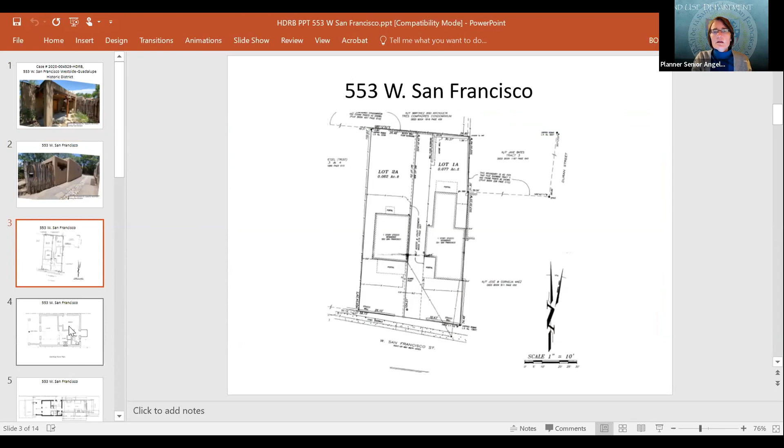This is parking here. The applicant proposes to add, this is the existing site plan. This is the existing house, and that's the existing floor plan as well. This is the proposed floor plan. This is the existing mass, and this is the addition on this side.

The applicant proposes a 500 square feet addition to its north elevation. Its height is 14 feet 4 inches, which is about 2 feet above the existing building and within the maximum allowable height in the streetscape.

The addition on its west elevation, okay, the existing west elevation, the side of the house, is this. This is the proposed west elevation. The addition will have 3 sets of divided light windows with territorial style wooden pediments, and they also have transoms. A new divided light wood door and small divided light window will be surrounded by a 1.5 inch brick mold and a concrete sloping sill added to the south of the window.

This is the creation of a new house entry. An outdoor fireplace is proposed for the exterior southwest corner of the building. I'll show that in another elevation. The east elevation features 2 of the same double windows.

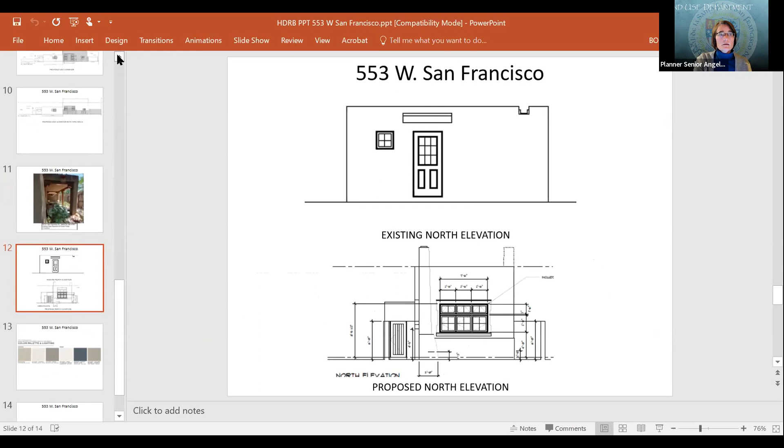On the south elevation, front of the house, the existing house south elevation is this, the front of the house. And the applicant proposes, behind the yard wall, a new portal and a new gate.

The new entry gate will be wooden, flanked by pilasters and a carved wooden overhang. This is the proposed new yard wall, gate, and the overhang, which is at the same height of the existing portal. The gate entrance leads to a path to the new house entry on the next elevation.

The applicant also proposes to add 2 new wooden gates to this east elevation. Stucco will be El Rey cottonwood, and the house's color palette includes whites under portal and for windows and door pediments, black sable for windows and door trim, and soft browns for the corbels and the beams.

Here's the palette. And the proposed light fixtures are these blue goosenecks.

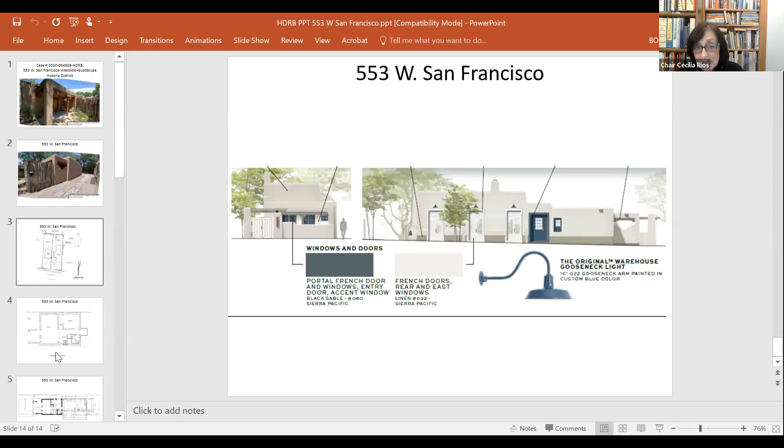Thank you, Angela. For clarification purposes, the 500 square foot addition on the north side, did you indicate it's going up to 14 feet 4 inches? Yes, and so the existing house is now approximately 12 feet 4 inches. Is that correct, because the addition is going up by 2 feet? Yes. And do you know the interior ceiling height of the proposed addition? I do not. Okay, I will ask that of the applicant.

Also, 3 of us were on the field trip today, Frank Katz, John Bienvenu, and myself, and I noticed there is a coyote fence right there in front of the entrance to what is the existing house now. Is that coyote fence remaining, or is that going to go away? I believe that's remaining. Okay, but I'll ask for clarification from the applicant if it's being replaced. Yeah, I'll ask the applicant that as well.

And can you also indicate to us what the public visibility is of the proposed addition? It's in the back of the existing building and is not publicly visible other than its height above the existing building. Okay. If I may add to that, it might be publicly visible, its east facade elevation would be visible at an angle from the street looking north.

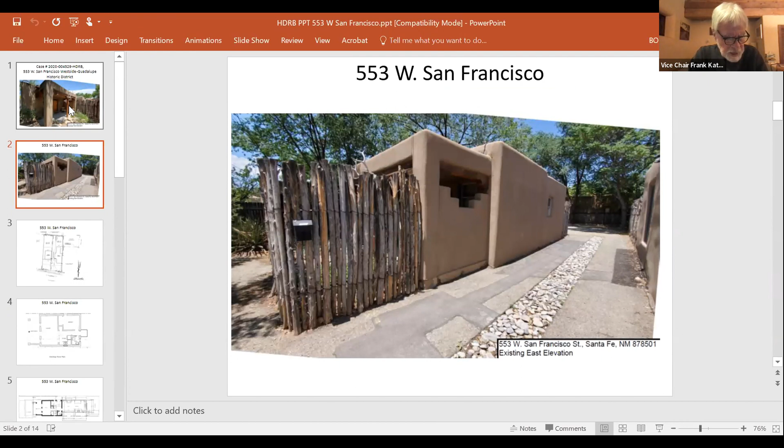The other question I have is the wood siding between the two windows on the new east facade in the back. Is that something that is appropriate style for this district? Vice Chair Katz, that is something that the applicant has added to the design, and in the Westside-Guadalupe Historic District, the design standards are a lot looser, and he can speak to that as he presents his case. But I assume that you would make an evaluation when you make a recommendation as to whether it meets the standards, and I was wondering if you had. I found that it meets the standards loosely. Was there a particular reference to that? No. Thank you, that's all. Thank you very much, Madam Chair.

Member Biedscheid? Thank you, Madam Chair. Yeah, I share Member Katz's concerns about the status, and I would be interested to know more about the history of this property, since it hasn't been evaluated recently and it qualifies on the basis of age. I had the same question about the wood siding.

I would like to know if there are other examples of this in the streetscape, in addition to the wood shutters that are proposed for the windows. I think it's a nice design, but I'm not sure if those elements exist in the streetscape.

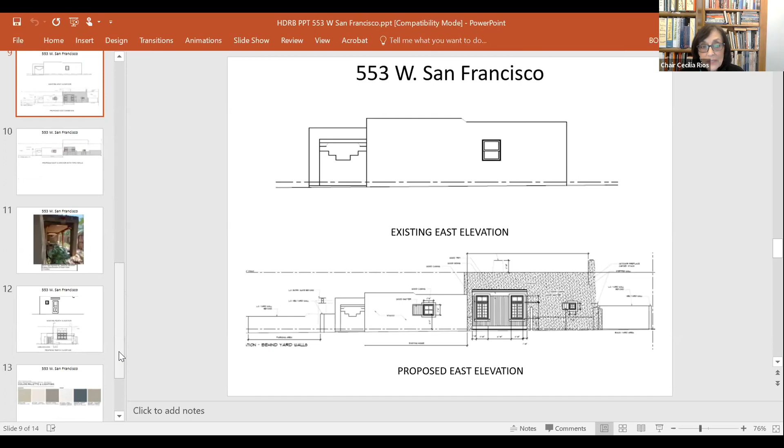And laundry as well. The new entry to the house will be on the west side. Is that correct? That is correct.

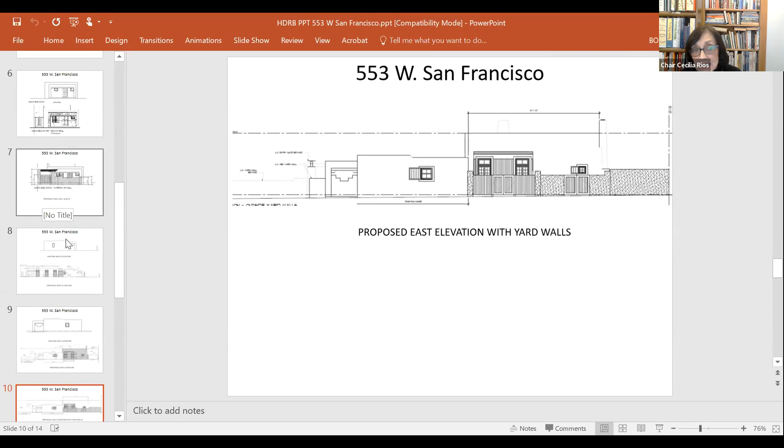Could you talk to us about the existing coyote fence? Is that going to continue, or is that going to go away? No, that will be going away. There were questions and some confusion about that. So you noticed there is a wall at the sidewalk. That will be maintained. The current coyote fence will be removed.

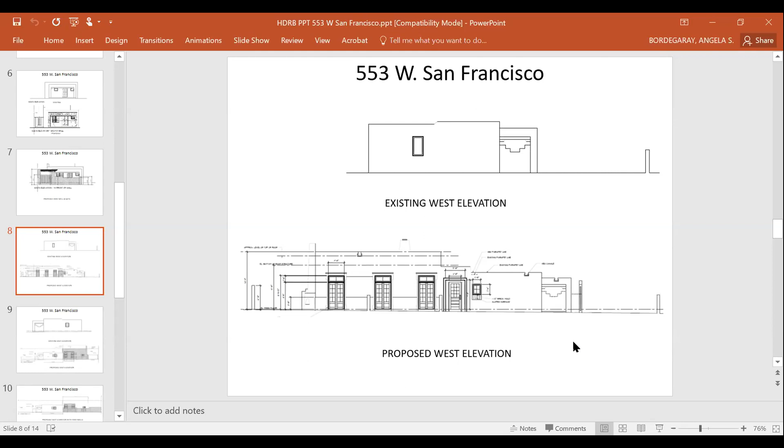What will replace it will be a 4-foot high wall. If you could go to that elevation, Angela, so we could look at it. It will be a 4-foot high wall.

We thought to go ahead and open that up so that you're able to, from the street level, see more of the character of the house. We never liked the coyote fence. It's way too tall. It covers up the architecture. It was never a feature that we really liked about the project, about the house.

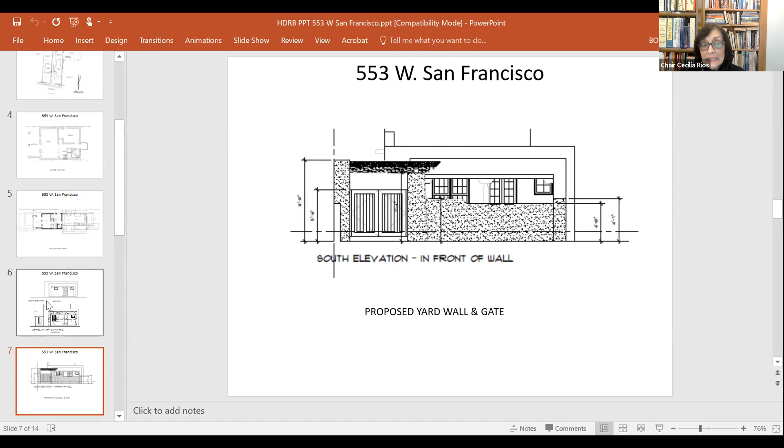So taking that down is an important thing for us. Reorienting the entry kind of makes us reorient the entry from the parking spaces, and that's why you have the design of this gate, which will give you access directly from the parking area, a straight shot down the side of the house into the new entry. And you are not planning a vehicular gate, correct, at the street? No, that is not in the plan.

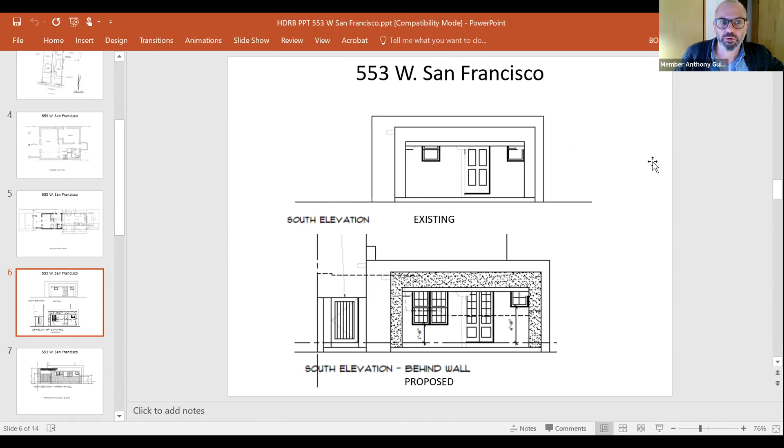Okay, Angela, if I may interrupt, Chair Rios, could you just show us the proposed plan? A lot of the stuff we're talking about would be a lot clearer. The floor plan. Member Guida, is that the slide before the one you're on right now? Sorry to interrupt. No, that's okay, I'm going to give you what you need. Are you wanting to see an elevation, Member Guida, or the floor plan? I'm clear on what's being proposed because I looked at the packet, but we're not showing the public the essential details here. The plan shows most of the things we've been talking about.

I would like to add that I did colored illustrations. You can see 2 of them on that last page. I've done colored illustrations for all 4 sides. I don't know why they're not in the presentation, but if you're interested in seeing them all, I can flash through them. I believe they were in the packet, but I'm happy to show them if you'd like to look at them, they might demystify things a bit more. I was under the impression you all were presenting that, so apologies for the misunderstanding, that you were doing a slideshow. Let me find them.

In the meantime, you indicated there were blue accents, can you be more specific on that? Yes, I'd like to address the color questions that came up, the blue being one of them. We are proposing that the entry door and surround are blue, and that will show up in the colored illustration I have. Under the portal, we're proposing that the new French door and new windows also be in blue. Unfortunately, Sierra Pacific's dark blue color is called Black Sable, I think, an unfortunate name because it's actually dark blue, not black. So to alleviate concerns about black on the house, there will not be any. It's a dark navy blue, just a little less purpley, a bit more on the green side of blue.

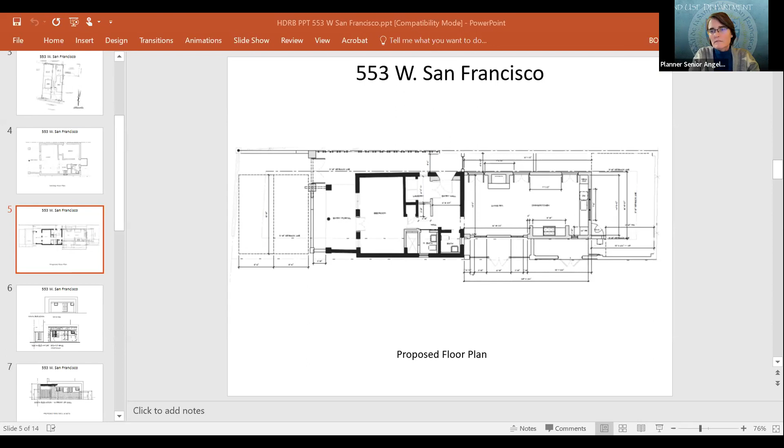Okay, can you see those? These are from your packet.

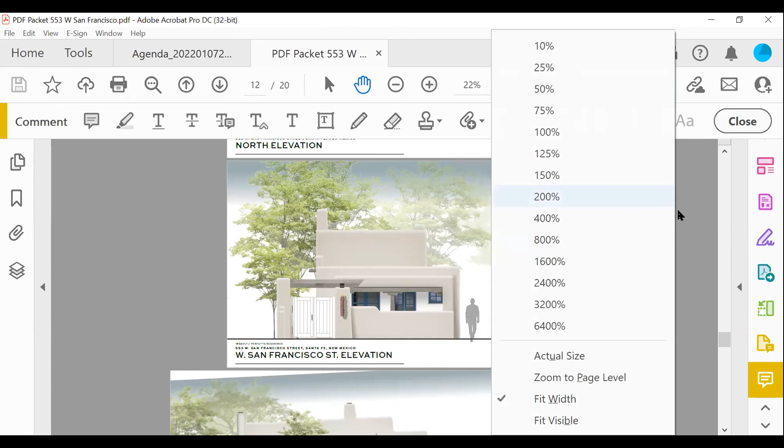So if you would go to the front, this West San Francisco street elevation. Yeah, so there you can see those are where the front facing facade windows and doors will have the blue accent.

We're also proposing a white stucco under the portal, and cottonwood as the color for the entire house is the one that we landed on. It is very similar to two other colors that are slightly warmer. I believe one is called Hialeah and maybe one is called Charleston.

Don't quote me on that. They're slightly warmer, a little bit less gray. We were trying to color match back to the historic building that is near the Arts High School in the rail yard.

I'm not sure if any of you are familiar with that, but there is the high school that's there. There are several kind of buildings around that. There is a historic building right next to that. I don't know what the current use is, but it may have been a restaurant in a previous world. We were matching back to the color of that building, which also has white territorial trim and white V-groove.

Those white V-groove garage doors were also what had inspired the V-groove gates and the V-groove paneling on the east elevation that you were questioning, that is between the windows.

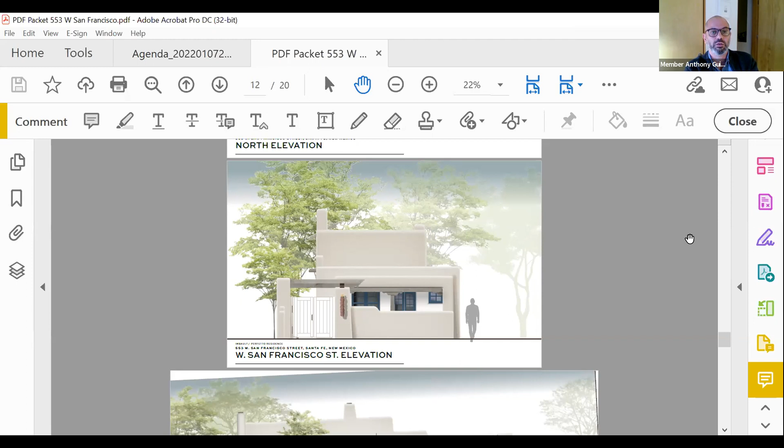But judging this project as fitting into an East Side context, I think is wrong. I think the board should be looking at this project in the context of this neighborhood and the articulation of the ordinance there. Overall, I think it's a great project. It doesn't overwhelm the site. It doesn't overwhelm the existing dinky little house. It makes a nice project in this district. I support it.

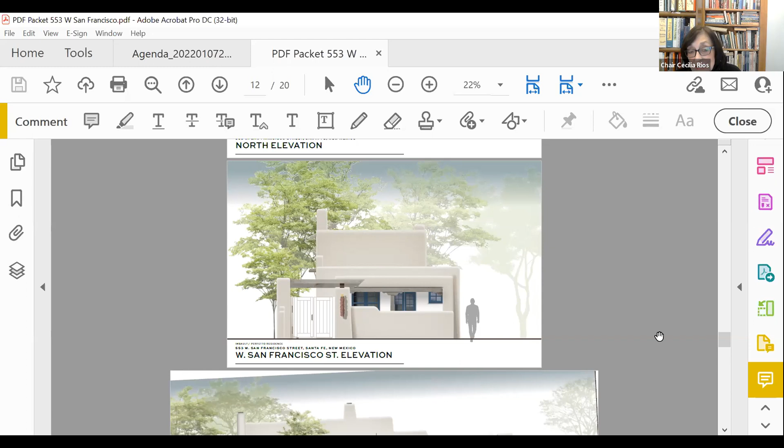Do you feel that the proposed addition is encroaching? Is that right on the easement? From what I am seeing, it is not, but did you indicate that it is encroaching on the easement?

Madam Chair, it's hard for me to tell from the slides that I've seen here tonight. I'm flying a little bit blind here, but I can tell you that the existing building is not only up against the easement, but right up against the property line as well. There is no setback currently, and it's unclear on that east elevation, on the east proposed addition, whether or not they're even getting closer. I don't think they can get any closer to the property line without encroaching on the neighboring property to the east.

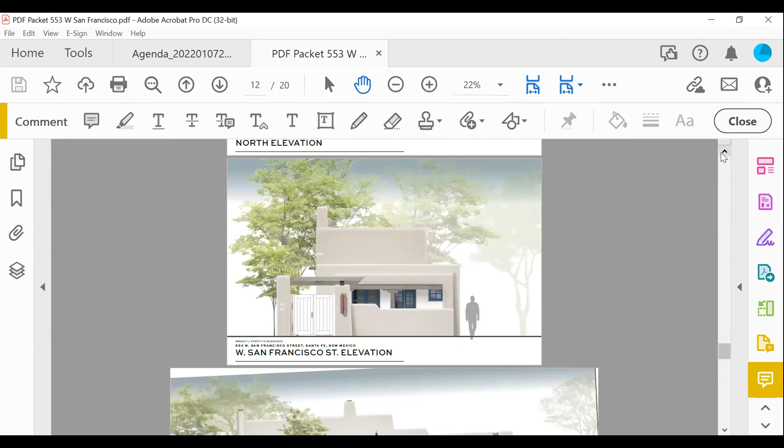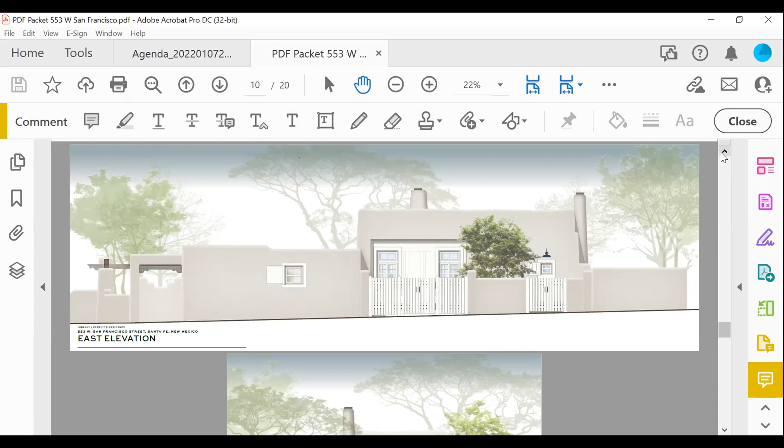Okay, we can get a clarification from the applicant in reference to that. Angela, just show us the existing versus the proposed floor plan. It's in the packet. Yeah, I think that was the best—existing, that's view, proposed.

What I see is a wall in front of it, and the doors through that wall open up right into the easement. Yeah, that's what I'm looking at as well.

And I'm not seeing on that floor plan the property line. But I know from the plat that the existing structure is on the property line or very close to it. The property line is drawn at the bottom of the proposed floor plan, the light line just outside the heavy black line of the existing house. Also, the site plan shows the property line and easement.

Correct, yeah, yeah, so those doors do open up over the property line. That appears to be so. And it's at least another 6 inches closer. So what this doesn't show is the proximity to the property to the east, and as proposed here would decrease the clearance in that little narrow driveway to about 9 feet.

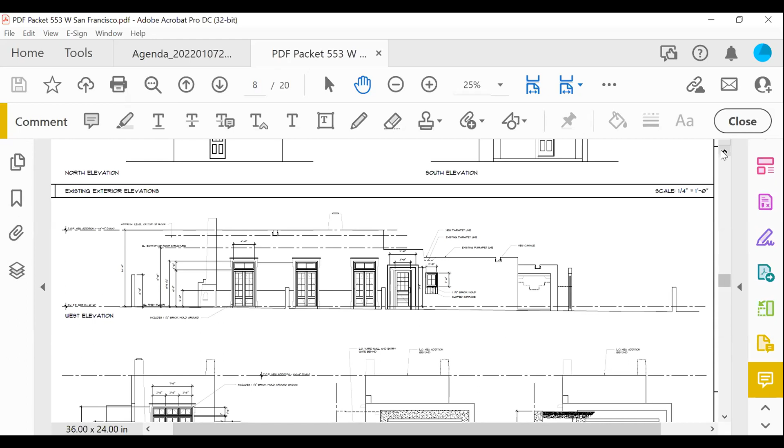That doesn't make sense. The other thing, I know that we're talking about lot coverage, which maybe we need to be careful about, but I noticed in looking at the proposed floor plan and comparing that with the site plan, that there's a 5-foot setback line, and the masonry structures which hold the gates on that new addition on the east elevation are built onto that setback. They encroach onto the setback. I don't know if that's relevant in this case, but it is something that I noticed and should probably be addressed by someone. Thank you, Madam Chair.

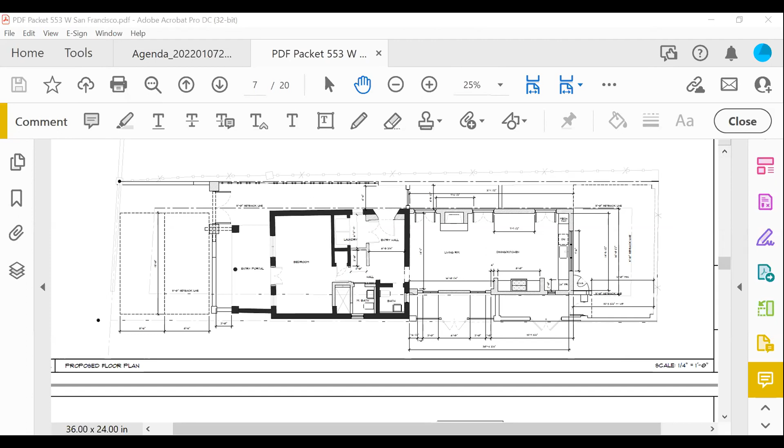And Angela, 14.4 is allowed. It is the maximum allowable, correct? Correct. It's based on the average of the applicable structures, buildings in the streetscape.

Thank you. Member Biedscheid. Thank you, Madam Chair. I just wanted to clarify my position for the board. I think what we're objecting to is the disparity in height between the original building and the proposed building.

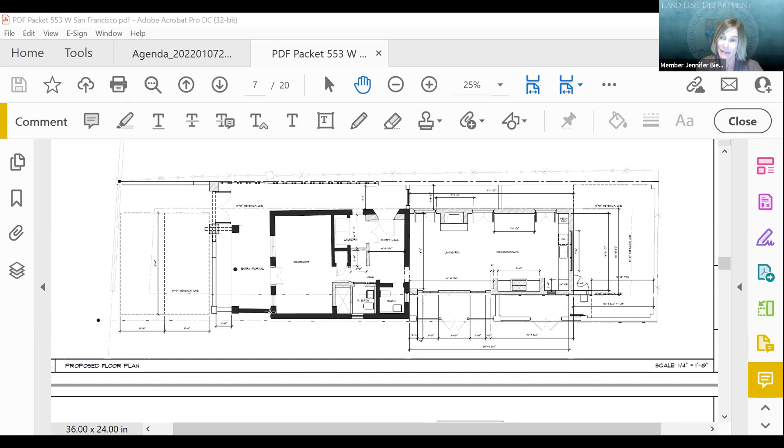But in thinking about it, I think the applicant is proposing exactly what we would advocate for in preservation. They're leaving the original house as is. They're not raising the height of that structure, which apparently has quite a low ceiling height and probably does feel quite small and cramped. But to their credit, they're maintaining that for the sake of the streetscape and harmony, and because they appreciate, presumably, the historic nature of that house.

The other thing they're doing that I think is quite commendable is removing the tall coyote fence and adding a low wall so that you can actually see that structure. And I wish more applicants would do that. They're also not adding a vehicle gate at the street, which blocks off the view of the house, which is often the case.

And I think in looking at the resulting lot coverage, it's very similar to their neighbors. I would say approximately it's 42% according to zoning, and I don't think that overwhelms the lot at all. So I support the project as well.

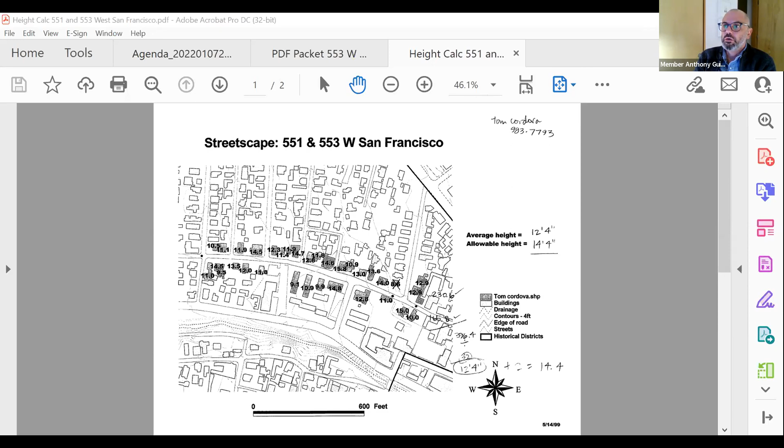Thank you for your comments, Member Biedscheid, and I'm going to take it to Member Guida, who was wanting to make a motion. Thank you, Madam Chair. In case 2021-004-529 HDRB, 553 West San Francisco Street, I move that the board approve the project as submitted, finding that it meets all of the district standards.

Seconds. And may we have a roll call vote, please? Member Biedscheid, yes. Member Bienvenue, yes. Member Guida, yes. Vice Chair Katz, no. The motion has been approved.

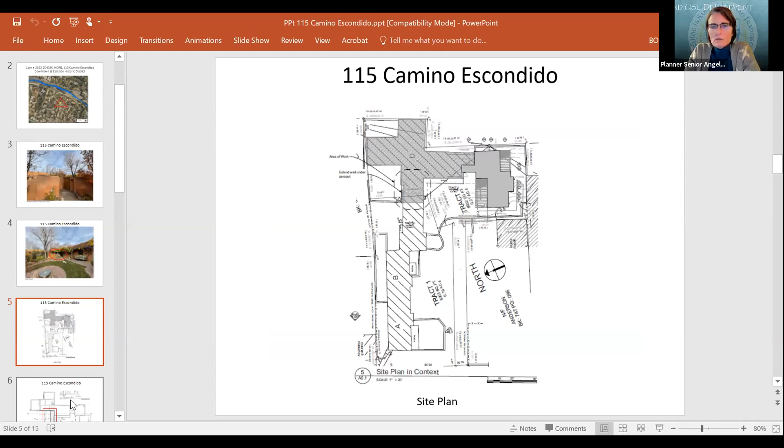This is the view of the approaching courtyard, and this is behind the courtyard wall, and the area of work is circled here in red. This is the front of the house. This is the south elevation, and here's the site plan. Here's the floor plan. This is the area to be worked on.

The south courtyard existing has these full length windows, they're even doors. There's a clerestory up here. This work was done sometime in the 70s and is believed to be... this is not a primary facade.

The applicant proposes to remodel the kitchen by replacing its existing full height windows, which are modern undivided light, large casement windows, with half height windows. This is the proposed half height windows. And the windows are under a portal.

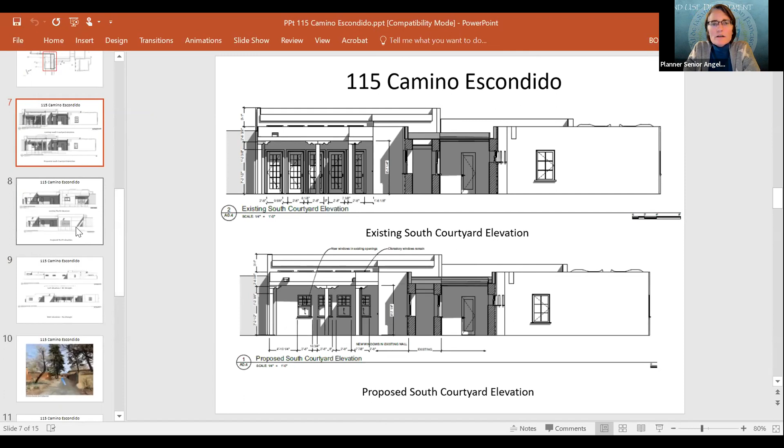Going to the rear of the house, the north side, this is the existing north elevation. We're talking about this area over here. It currently has this window and this overhang and these two doors.

The applicant proposes to bring out this portion of the wall to be flush with this, so it's one wall, and replace this window with 4 divided light casement windows. That's about a 4 feet extension to make it flush with the existing wall. The east window will be removed, and the west windows will be replaced with new divided light sliding doors.

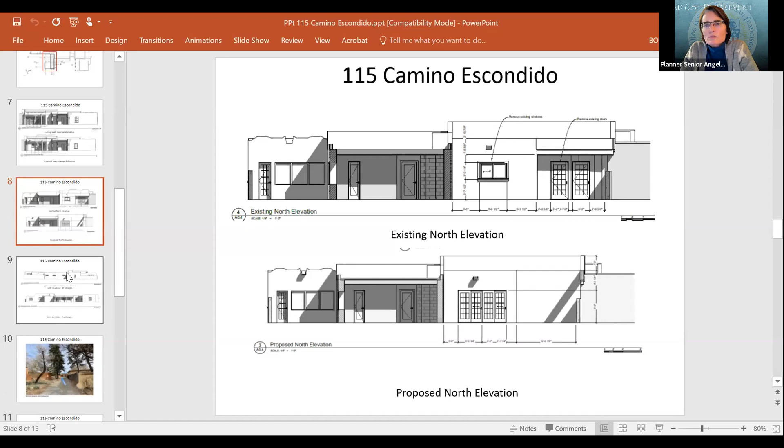The stucco will be patched and color coated to match the existing, and the exterior light fixtures will be shielded for night sky, with both decorative metal and ceramic fixtures proposed. Staff recommends approval and finds that it complies with section 14-5.2D, the general design standards for all H districts, and 14-5.2E, the downtown and east side district standards. And with that, I conclude my report.

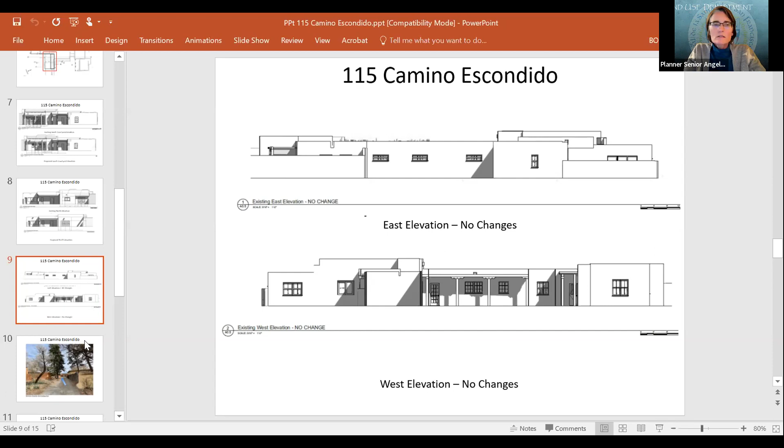So the work that is being proposed is not being done on any primary facades, is that correct? That is correct. Okay, thank you.

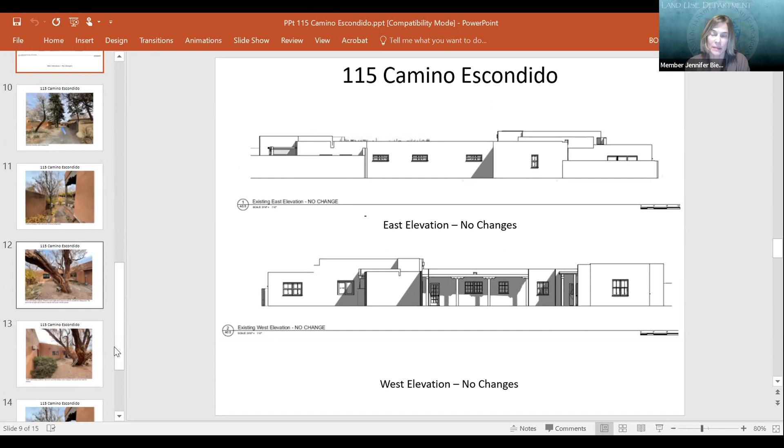Member Biedscheid: All right, Madam Chair, that was also my question. What are the primary facades? Member Katz: Well, that's my question too. What are the primary facades? Are there primary facades? Which ones?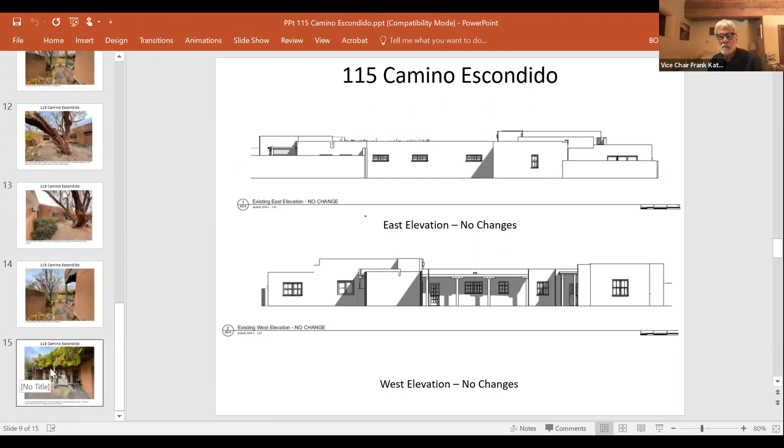Yes, members of the board. The primary facade is the front of the house. Let's go here. This is the facade being proposed for alterations. This is the front and the west facade that's considered primary. Thank you very much, appreciate it.

Okay, and Angela, would you describe where this house is located on Camino Escondido? It's quite a ways from the road. It is in this vicinity map. This is the river. This is Alameda and Dirt Alameda on the other side of it south. This is Camino Escondido, so it's Canyon Road's way up right here. And so this is towards the river east of Camino Escondido, and it has a long driveway entrance. Yeah, okay, thank you.

And I believe the applicant is Gayla Bechtel, and I see she is there. Gayla, can you hear me? Yes, I can hear you. Would you please swear in Gayla? Do you swear under the penalty of perjury that the testimony you're about to give is the truth, the whole truth, and nothing but the truth? I do. Thank you. Please state your name and address for the record. Gayla Bechtel, 320 Aztec Street, Santa Fe, New Mexico, 87501.

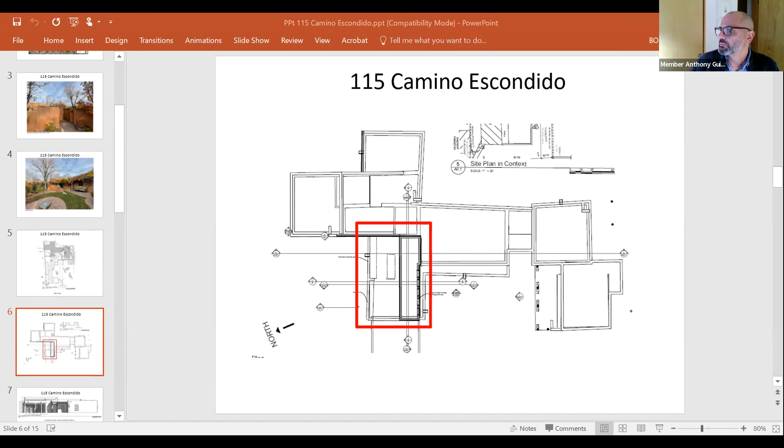Thank you. Good luck on your project, Gayla, and good evening. All righty, well, that was quick.

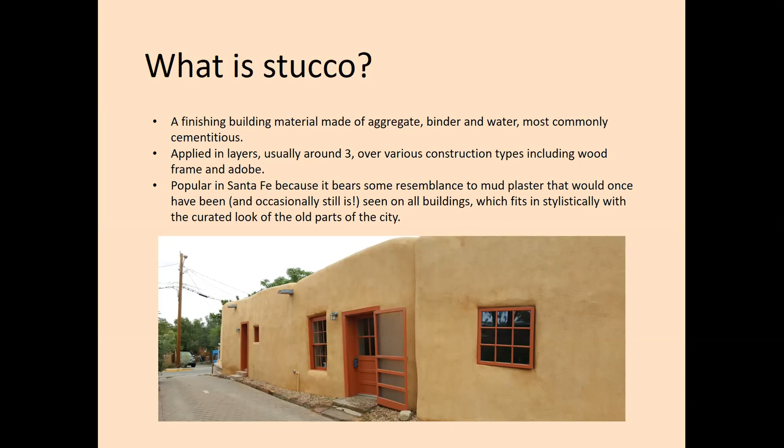To clarify one other point I've had many questions on: stucco and plaster are really the same thing as each other. It's more a semantic thing than a real material difference. Plaster is usually used to refer to an interior material, which might still be a cement material, while stucco is really just used outdoors on the exterior of a building. It's also specific to a cement or synthetic, like elastomeric, material. Things like lime plaster and adobe plaster are still generally called plaster even when they're on the exterior.

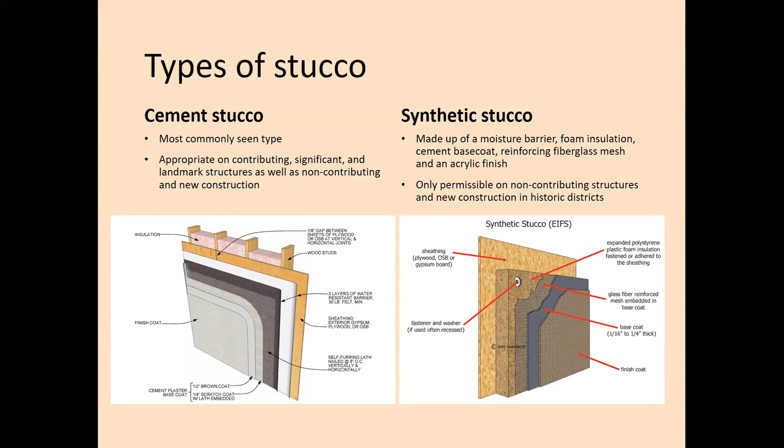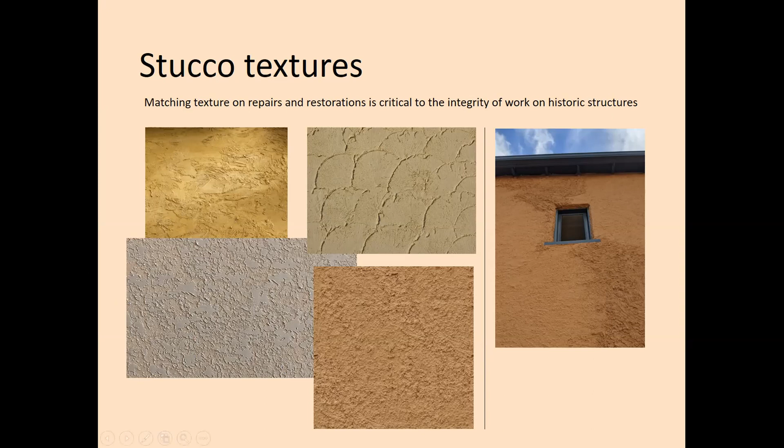Texture really can make a big difference in how a repair or an addition looks. On the far right here I have an example of what I'd consider a fairly mediocre repair, where the texture is very different in different portions, and where the repair was done is pretty evident. There's certainly an art to the application and matching of textures, and things might not always be completely invisible, but this is all done with fairly simple tools, trowels, sponges, and brushes. So there can be very good texture matching, which goes along with color matching as well.

As well as the whites are also seen sometimes. And just going back to repairs and matching things and adding additions, these colors will change over time, even when they're applied. So there's fading, there'll be variability, and these pre-mixed colors are really much more of a guide than anything. Sometimes colors can be similar but mixed differently, just to get a consistent color along a whole building.

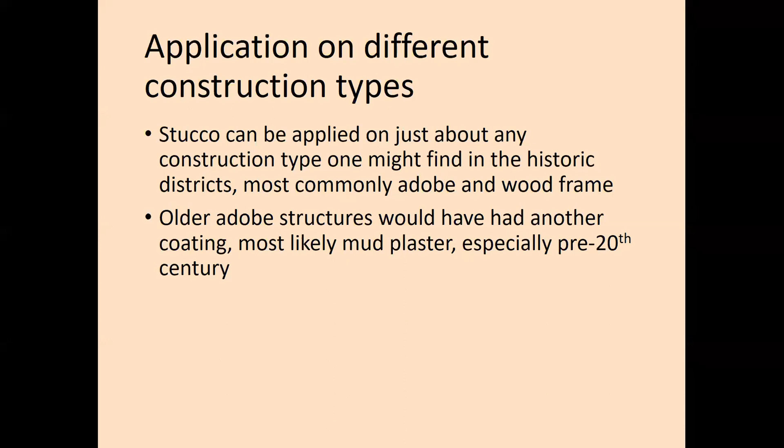So that stucco would have been at some point in its history an attempt to keep that same look, but to reduce the maintenance time. Mud plaster needs maintenance most years, and stucco certainly lasts much longer than that. It has a much longer maintenance cycle. So on adobe in particular, the stucco became very popular because it meant that you did not have to be working on a building every year seasonally.

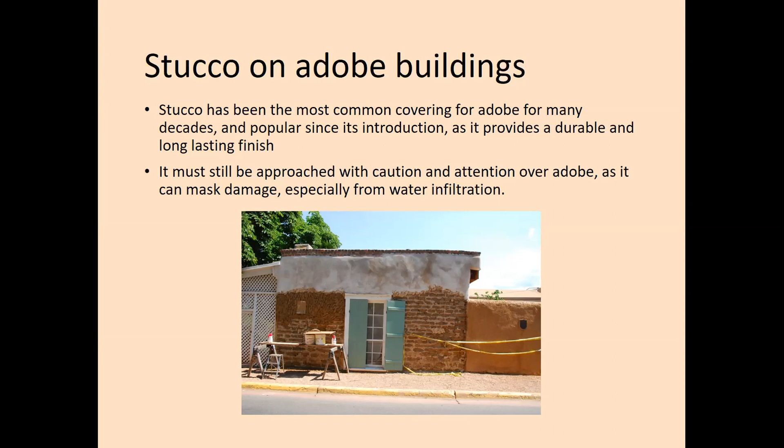And it works very well often, but it is a material that can hold water in against a surface, both on wood and on adobe. So it definitely needs some caution as it masks damage. If there's ever water infiltration, say from a roof, it can hide the problems until they're very large.

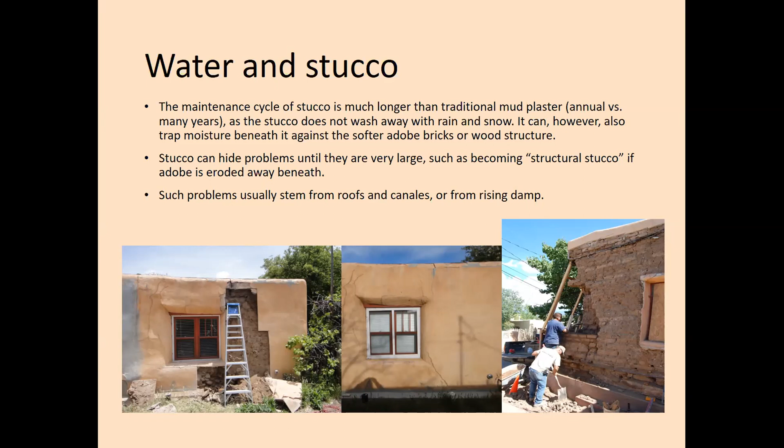But that said, with attention and some maintenance and attention to drainage and water removal, it's a very long-lasting and low-maintenance material. Cracks are really the main indicator of an initial problem, and underlying causes of issues, mostly roofs and rising damp. If those are addressed, then usually the stucco is absolutely fine for many years and does not require very much.

And I will add as one additional note that the cement and elastomeric stuccos are somewhat dissimilar materials, so it's better to use like with like. The elastomeric is much more similar to a paint when it's applied over the cement, and paint itself is not really an appropriate material over stucco. It causes peeling and difficulties, and it's at least currently not permitted over any of the more significant properties, even for covering other paint like graffiti.

So the two materials work fairly differently from each other, as well as working differently from, say, a lime plaster, which one sees very occasionally. So it's not as commonly noted here in historic districts. And that's sort of my general brief informative talk about stucco, and I'm happy to take some questions if people have them.

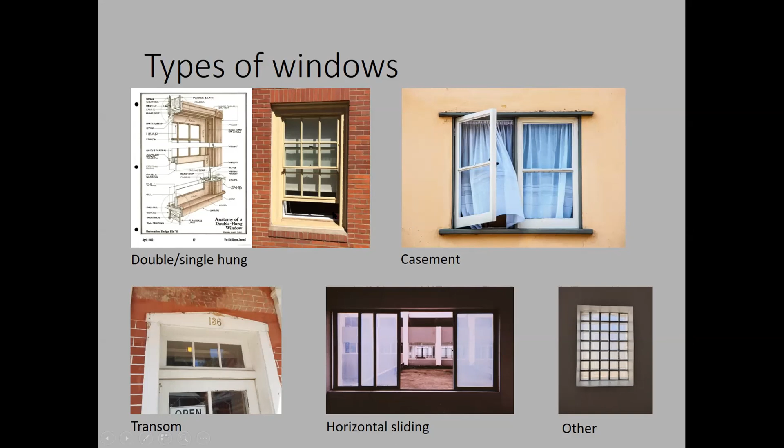There's definitely some different oddball versions of windows, but the casement and the double or single hung are what are most commonly seen. Double hung means both the upper and lower sash will move, and single hung means only one does - almost always that will be the lower sash. They can be made out of a whole variety of materials. Wood is certainly the most traditional, and that's what pretty much all windows would have been made out of until about the 1880s.

Whether they be double hungs like this one pictured, or casements, steel windows were introduced in the 1880s. They didn't really become popular in places like New Mexico and the Western United States until after World War I. They were more of a European invention.

And then there's the vinyl, or more recently that's been kind of upgraded to a fiberglass, which is a bit more durable. Those were invented in the 1950s, sort of in response to the fact that we had cut down a lot of the old growth forests that were serving as building materials in the United States, and they were done as a cheaper and more accessible alternative.

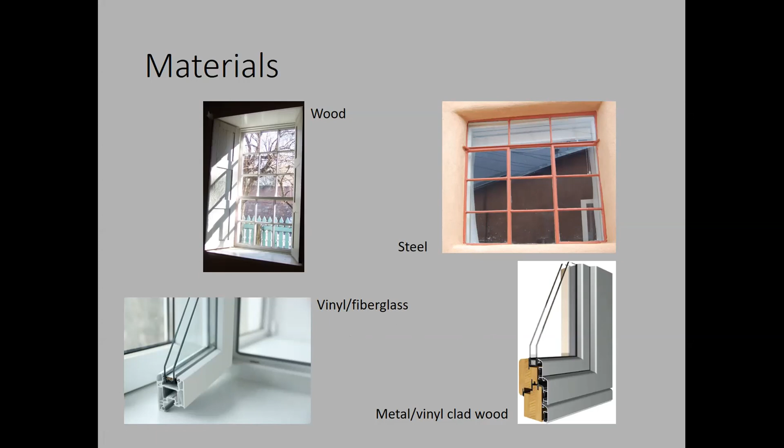I think I preempted my slide here with the chronology, but just generally, really the earliest operable windows with glass, they were all casements. They would have hinged to the side. That's what you would have seen until really the mid 19th century, and then the double hungs become fairly common.

And in the mid 20th century, after World War I, and certainly after World War II, there was a big shift toward things like vinyl windows. They were much cheaper, and we didn't have quite the quality of wood available anymore.

And that is certainly a concern with modern wood windows, is that it's not easy to get quite the quality of wood, and they're a lot more prone to rotting than something from, say, 1850.

And that relates a lot to the sustainability of historic windows, that they are made of this really incredible, dense, old growth wood. They've already proven that they can last 100, 200 or more years. And with some maintenance, I'm sure well beyond that.

The actual estimates from the companies making a lot of the replacement windows say 15 to 25 years. I've heard a few say maybe 40 years for the lifespan of their window before it needs to be fully replaced again. And if that's their own estimate, that's a bit optimistic. Sometimes it is less than that.

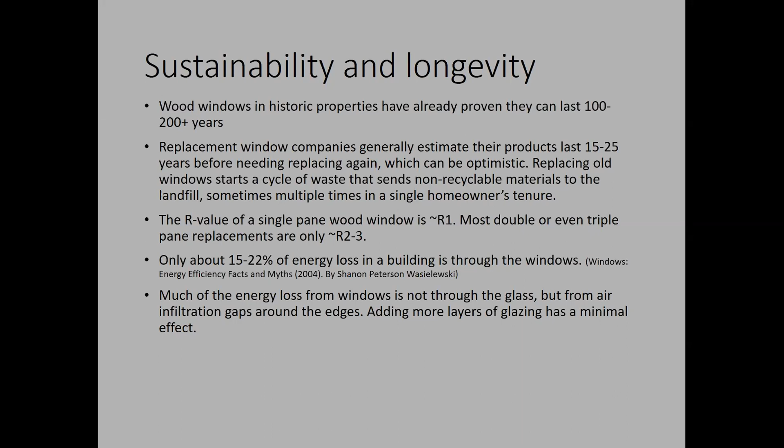And that is something that can definitely be addressed in older windows without fully replacing them. The repair and restoration of old windows, there are certainly specialized parts, but quite a lot of it can be performed by a handy homeowner or a handyman.

It is paint and it might be glazing putty. Glazing putty is the material that holds the glass panes in place, and that can deteriorate over time. I've taught many people how to fix both of those things in less than a day. The sash can be popped out and easily worked on to replace that putty and paint.

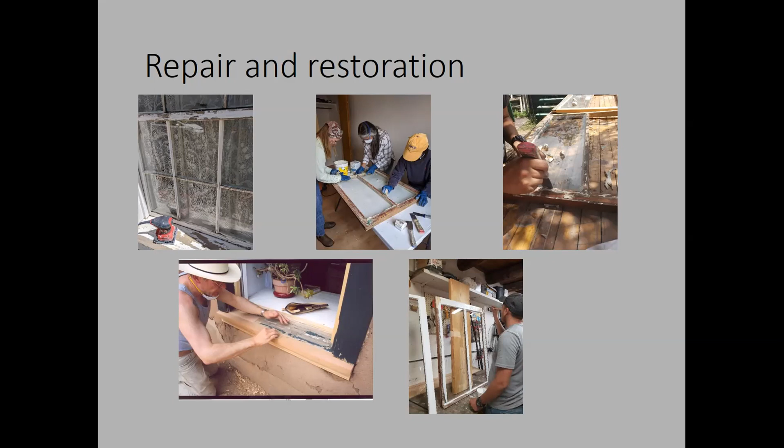And addressing the air infiltration that I mentioned, weather stripping is a really powerful tool that basically just means using a material to fill any gaps around the edges of the sash. It's usually metal or felt or foam or maybe a vinyl. It can be as simple as something that is put in seasonally, say in the winter time when you want to seal up the gaps to keep it warm, or it can be for a number of years. The metal weather stripping, there's some that is many decades old that lasts just fine.

like foam and felt that just fill in any gaps. It's very easy for someone to just put their hand up to the window and feel where there's a gap and fill as needed. It doesn't really require any construction. There's no larger intervention involved. And it's definitely a factor to consider long before full replacement of a window.

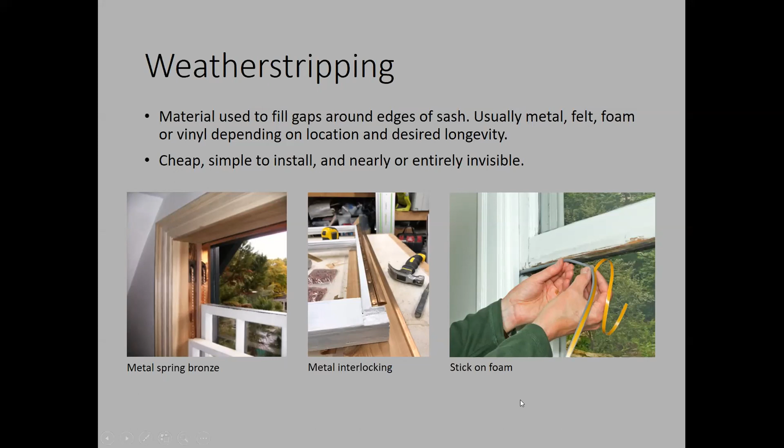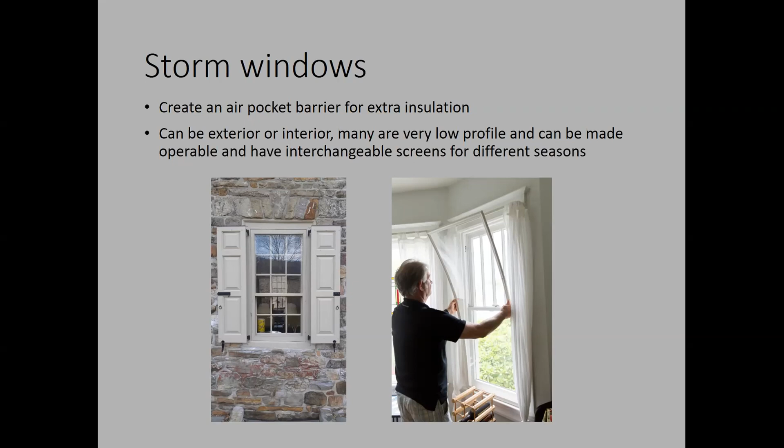And the interior storms are a relatively newer invention, maybe 25 or 30 years old, and it's basically just a plexiglass panel that just pops in and pops out as needed inside for an extra layer. They're totally invisible from the outside, and they're very easy to handle. They're lightweight. So either of these options are another way to add an extra air pocket that insulates a building and do so with very little visual interruption to the building. And it also, as an exterior storm, adds another layer of protection from weather to the actual older sash. So that's another benefit to them.

So I think maybe I have revealed that I think there's almost never a reason to replace an older window. I would say something from before 1950, at least in terms of damage and decay and structural reasons, they can be repaired fairly endlessly. I will say when I worked in window restoration shops, we had people bring in windows that were literally in pieces, in boxes, and we put them back together and made them functional again. There's a lot that can be done.

And again, if there's rot involved or if something is shifted a lot, there are individual pieces that can be replaced and repaired for a long ways before the whole window is completely unsalvageable. There are, of course, times when a window might be taken out for other reasons, but structurally and integrity-wise speaking, they can be saved for a very, very long time.

If anyone has any questions, I'm happy to answer them. I will also say that a lot of my resources came from the Window Preservation Alliance, which is a great source of information about old windows, and I really recommend them.